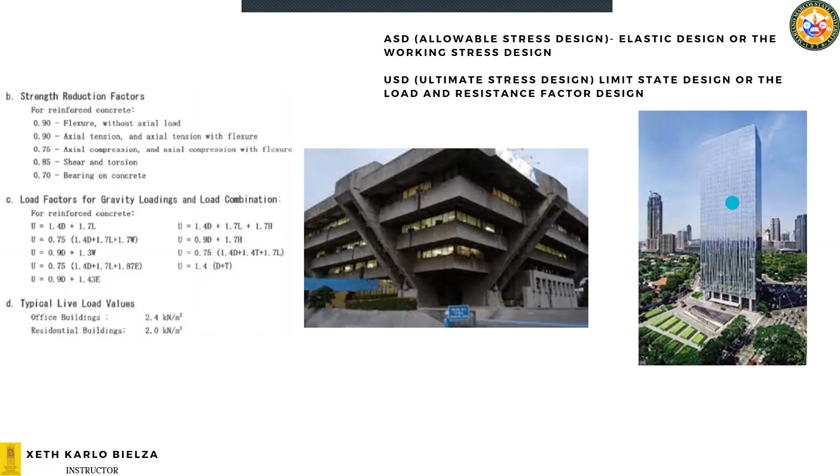So why do we need to study this analysis? Kasi we're talking about the building integrity or the stability of the structure. We want to keep the structure in its state of equilibrium. So kahit na anong mga reaction or mga internal or external forces that will react on the members, we want the structure to return to the state of equilibrium.

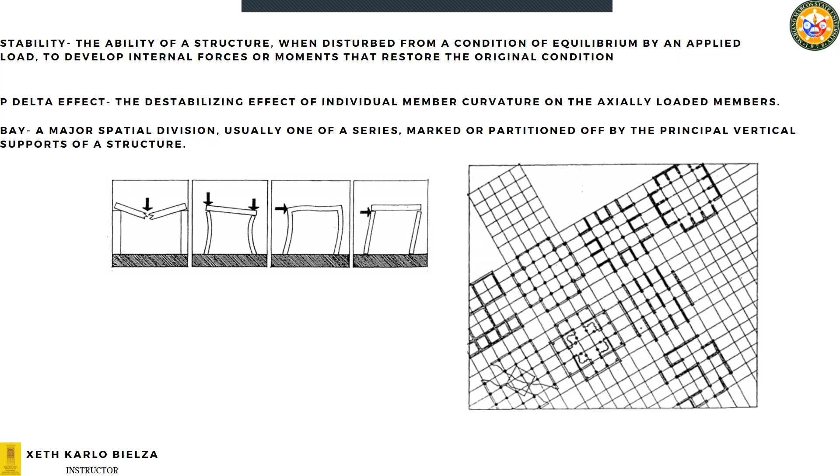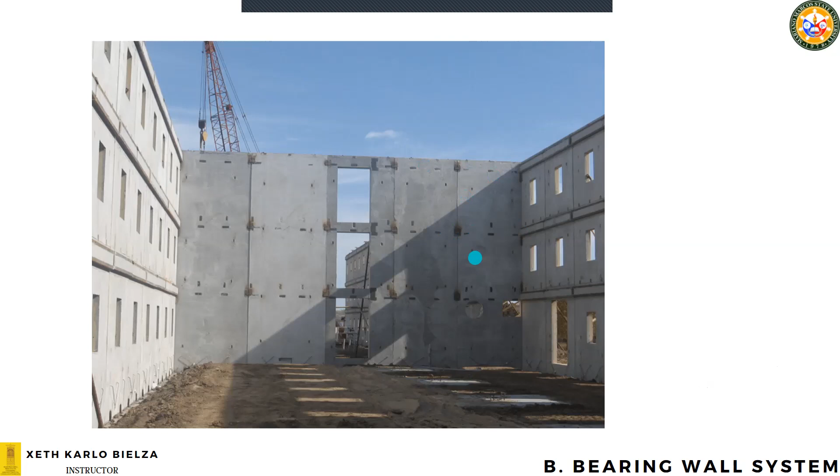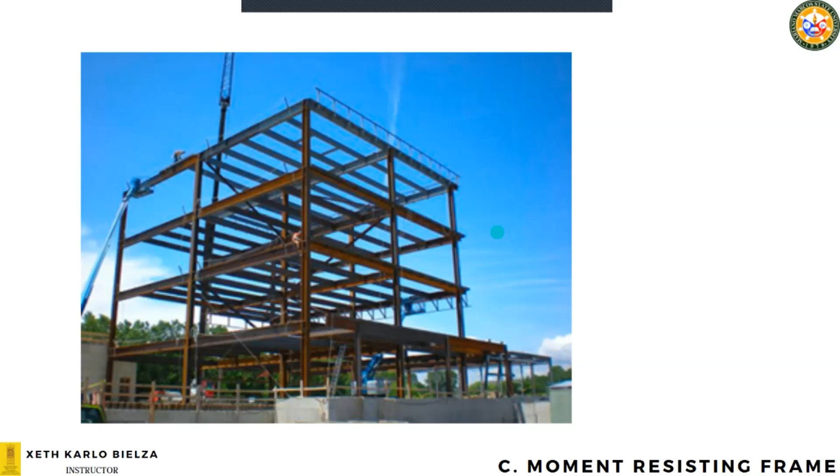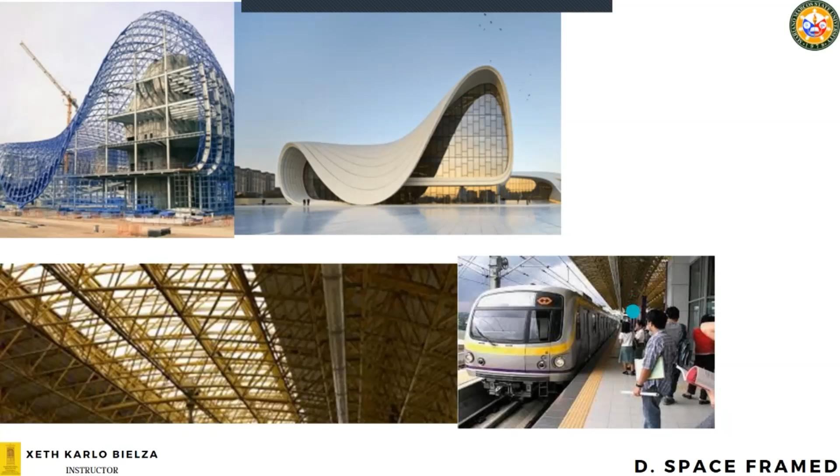And then in the structural code, reinforcing bars shall conform to ASTM A615 grade 33 for 12 millimeter diameter bars and grade 40 for 16 millimeter diameter bars. Bakit? Kasi usually ang ating mga 16 mm na rebar, this is for structural use. And yung ating mga 12 mm naman na rebar ay for architectural use. So pang kabilya ng CHB, or pwedeng pang stiffener column yung 12 mm. Pero kapag structural, i-reinforce natin yung ating mga columns, beams, and footings, so yung ginagamit natin is minimum 16 millimeter diameter and minimum grade 40.

So itong image naman na ito yung isang example ng structural note in a residential project. So ang minimum requirement ng NSCP for structural members, yung ating suspended slabs, beams, columns, shear walls, footings, and RC walls, 3,000 PSI daw yung strength ng concrete. Whereas yung slab on grade kahit 2,500 lang. And then the aggregates, maximum size of the aggregates 3/4 inch.

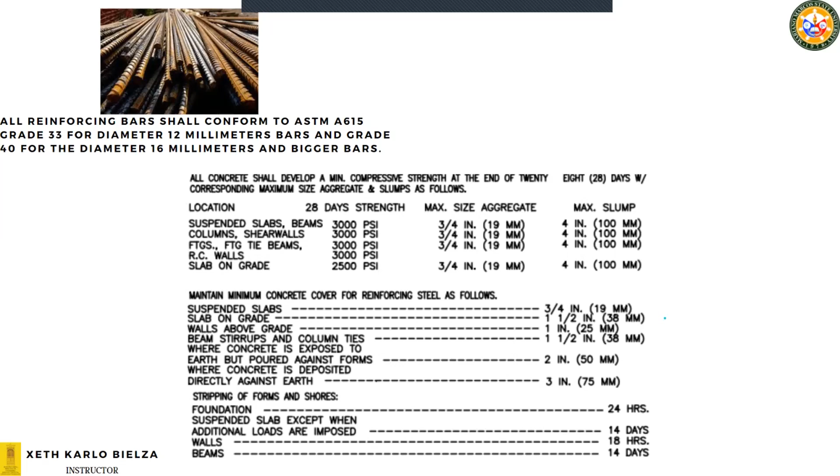And then yung ating concrete cover naman, it depends on the member. Pag suspended slab, the minimum concrete cover is 3/4 inch or 19 millimeters. Pag slab on grade, 1.5 inch or 38 millimeters, or in actual, ginagawa yan 40 millimeters na lang kasi mas madaling sukatin. And then stripping of forms and reshoring. Yung foundation, after 24 hours, pwede nang i-remove yung forma. Pero kapag suspended slab at yung beams natin, 14 days yung stripping.